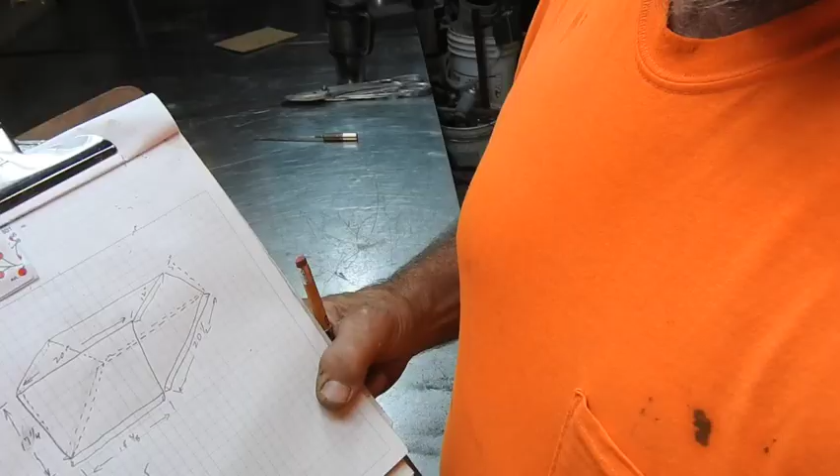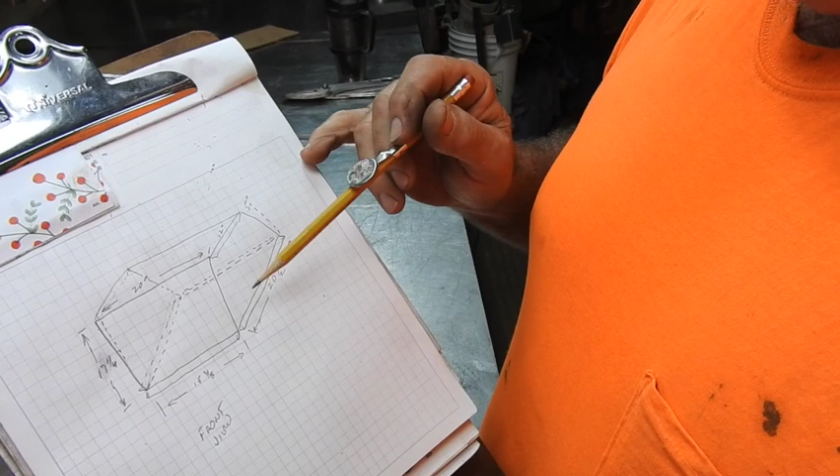The plenum for today is going to be a little bit strange insofar as I managed to get the furnace to where the front of it could go straight up and down, but the left side has to taper out 3/8 of an inch in a 17 1/4 inch true height, and the right side has to taper out 1 3/8 inches to the outside. At the same time, the rear has to funnel forward or tip forward 5 inches in order to meet the opening we have. So it's going to be kind of strange. One side, just the front, is going to be straight. Everything else has to be an angle.

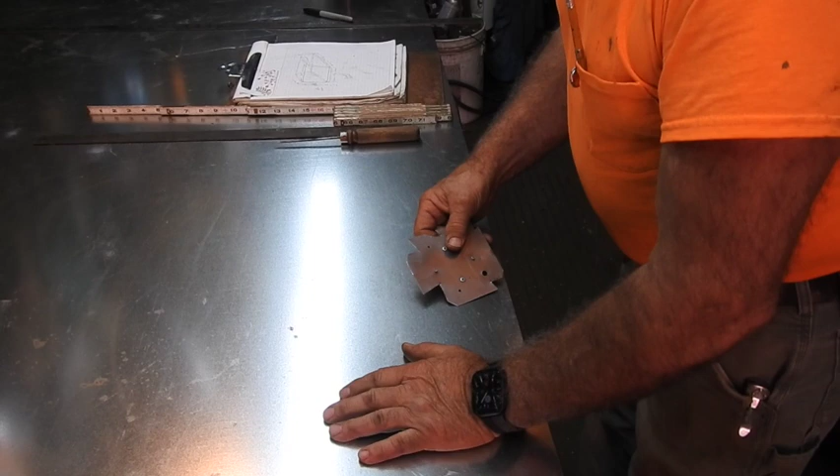When you start laying something like this out, you want to start by laying out something you know to be true. We know we're going to have 1 inch at the bottom for a double hem flange. We know it's going to have a 3/8 of an inch offset to the outside. So until we decide if we're going to put a 1/4 inch bend on it, a Pittsburgh, or a lock former bend on it, go ahead and give yourself plenty of room.

So make yourself a false edge, roughly 2 inches in from the outside. Another known is the 17 1/4 inch height, so you can put a height on it of 18 1/4 to compensate for the 1 inch double hem. We'll go ahead and mark that as 18 1/4 height in two places. Then we can turn right around and drop 1 inch off of that, because we have to have 1 inch for either the drive or the S at the top.

Now we have defined both the top and the bottom of the fitting, or the true length of the fitting.

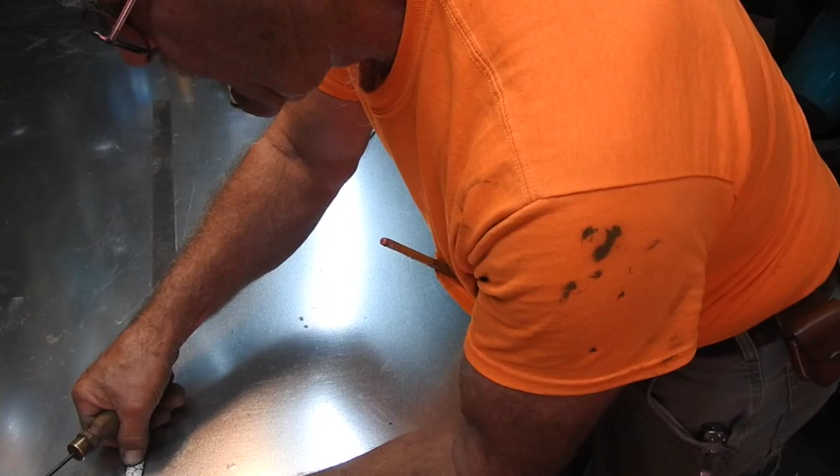Now, because we marked a false start line of 2 inches in, we'll go ahead and mark one up here, 2 inches in on the 1 inch line down from the top. Then from there we'll add 3/8 of an inch back to the outside edge, and that'll give us our 3/8 of an inch offset to the outside edge. Once you get that 3/8 marked, you can connect those dots. That angle right there will be the 3/8 of an inch to the left.

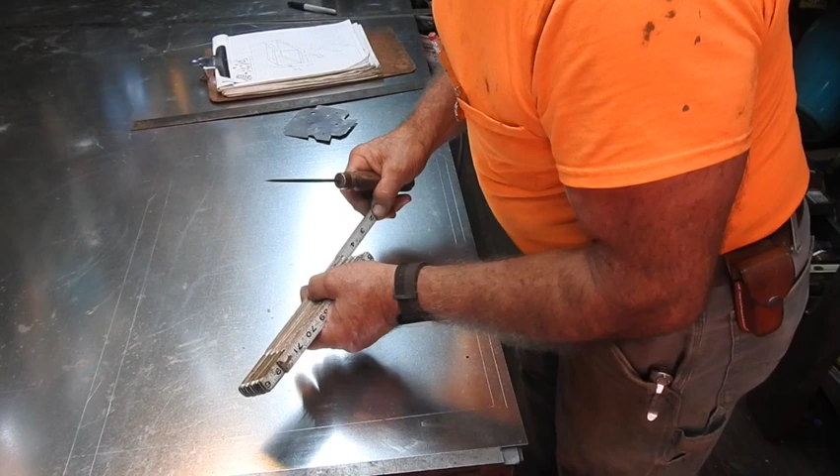We'll either have to add 1 inch for a lock former, or add a 1/4 inch for it to go into the lock former. That remains to be seen. We know the top width is going to be 20 inches, so we can come off of that line and mark a width of 20 inches on the 1 inch line.

And we know the layout calls for 18 3/8 at the plenum bottom, so we can go right here at 18 3/8 along the 1 inch line. Now we can connect those two dots. That's the angle for the 1 1/4 inch that it has to go out to the other side.

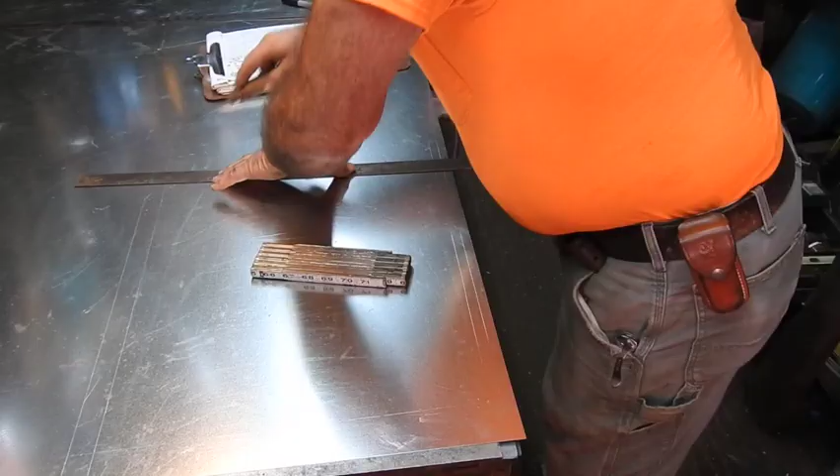I'm not going to put a lock former on this fitting on the front of it, because I don't have access to lock the lock former over on site. So this is going to have the 1/4 inch bend. We'll mark a quarter, and then we'll connect those. That's the basic layout for the front of the plenum.

Trim out the corners.

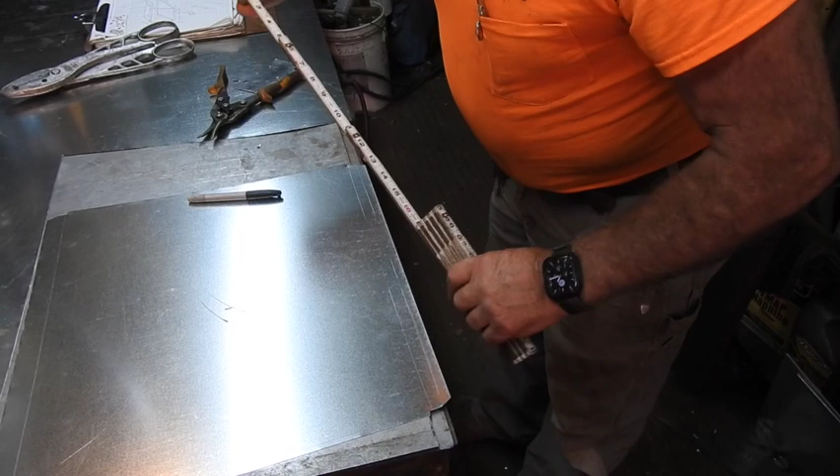We know the true length of this is going to be 18 1/4. Now to get the length of the next piece of metal, measure from your 1 inch mark right here to your 1 inch mark right here. That's roughly 17 1/4 inches, plus 1 is 18 1/4 inches. With only a 3/8 inch offset, we only gained about 1/16 of an inch in that offset. So 18 1/4 is going to work fine on both of these layouts.

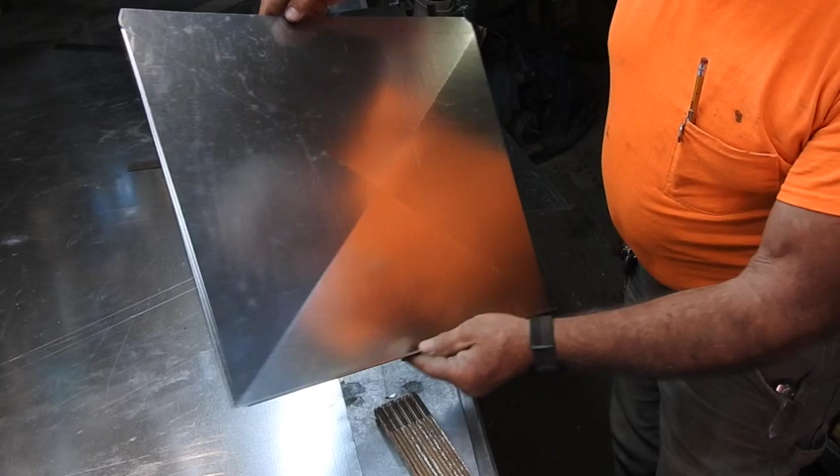Here it is folded up right here. Now we can actually measure and get the lengths of the material we need in order to lay out the sides. This side is going to get really strange because it has to start out at 20 and a half inches at the bottom, it's got to go up 17 1/4 inches, and it's got to drop down to a 12 inch dimension. So I'm going to go ahead and cut that out.

There's the layout of the right side, cut and ready to fold. Again, we have to lay it out opposite because I'm looking at the outside of it, and we need to fold it to the inside. I like to cross break this before I run it through the lock former.

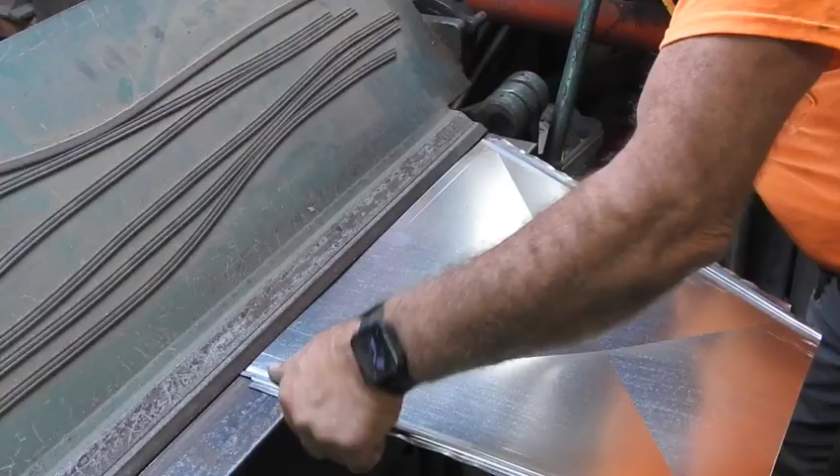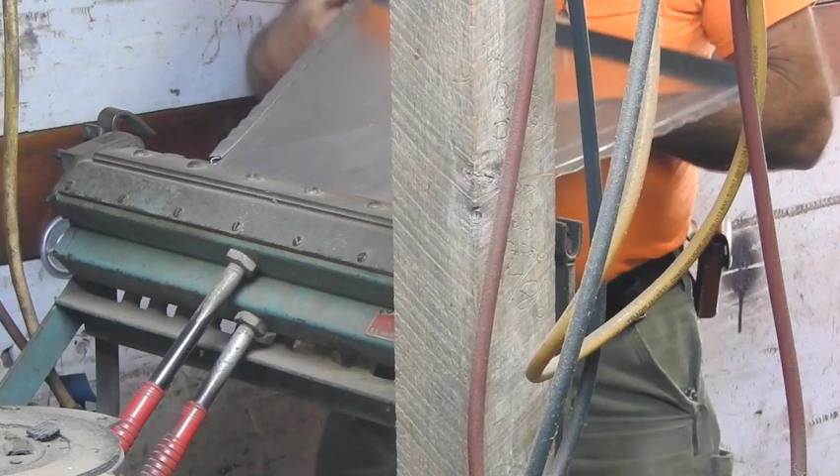Now we go to the cleat bender and form the drive cleat on the back side of this. Again, start off with what you know: the 1/2 inch double hem down at the bottom, our actual raw length, which is going to be 18 1/4 for a finish of 17 1/4 when it's all said and done. So we'll mark the top first, 17 1/4 plus the 1 is 18 1/4. Now we can mark those.

We know the bottom is going to have 20 1/2 inches. This is going to be the front, so this is going to be straight up and down. We know this is going to have a lock former, so we can mark the lock former 1 inch on this. On the 1 inch line, come in 20 1/2. And we know the top is going to be 12, so come in 12 off of the 1 inch line. Connect those dots, that should be the angle of the transition.

Add 1 inch to it for the lock former at that angle, and that should be the layout. So now we'll cut.

Now we can trim. We'll cross break and lock on.

Now this guy here gets a little tricky because we're not really using math to figure the angle. We're using actual measurements off of the piece of metal. But again, go with what you know. Double hem, we know we're going to have a 1/4 inch on each side of this.

Cross break, fold the 90s on it, put the hem on it, and we'll come back. This one doesn't get quite a 90 because it has to go up at an angle. It's all field adjustable.

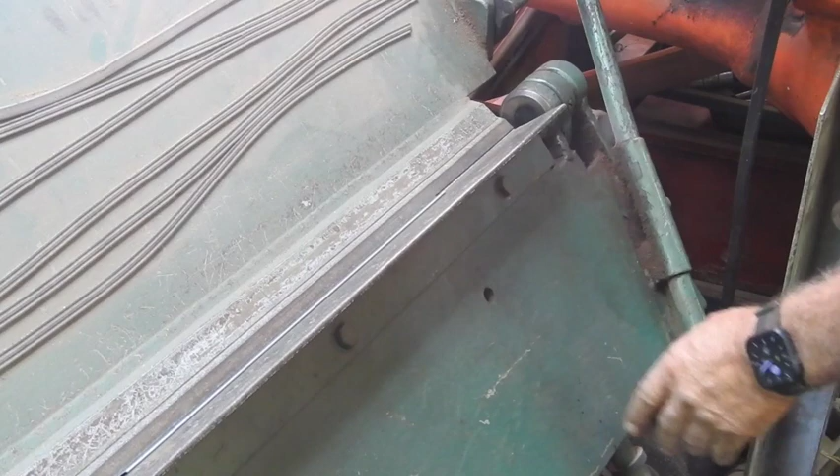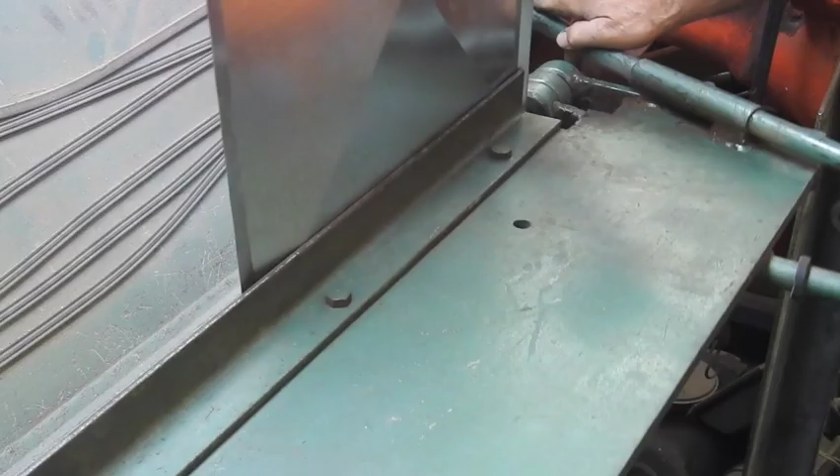Okay, so here we have it. Now bear in mind, this is not assembled, it's just stuck together in the Pittsburghs. It's not squared, not plumb, like it will be on a job site. But remember, I always say don't assemble all your fittings, especially on furnace changeouts, inside the shop, because you need to field install those depending on how the access is around the furnace.

This particular one here, I believe, is going to be able to be installed with the two sides and the back in one piece, with the front piece, which is right now in the back, being the last and final piece to be installed. But I think I'll be able to do it that way.

But here you have, it's 18 3/8 at the bottom, flaring out to 20 inches with 1 1/4 going that way, 3/8 of an inch going that way. At the same time, it's drawing inward to reach the 12-inch dimension of the existing duct we have to tie into.

And this will actually be the front view of the furnace. So what you'll see is you look at the very front of the furnace right here. You can see the slight flare to the left side. That's a 3/8 inch flare out with the 1 1/4 flare this way as it changes dimension from 18 3/8 to 20 inches.

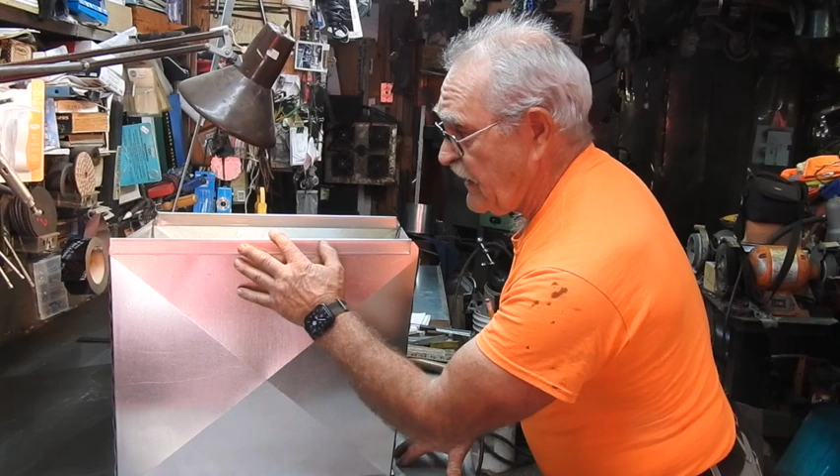This particular job is a prime example of why you don't want to assemble in the shop plenum. Leave it in 4 pieces so you get to the job site to decide how it needs to go in. This particular one here, you can see I've got the 2 sides and the back knocked together so it can go together in 1 piece. Then we'll add the 4th piece on the front.

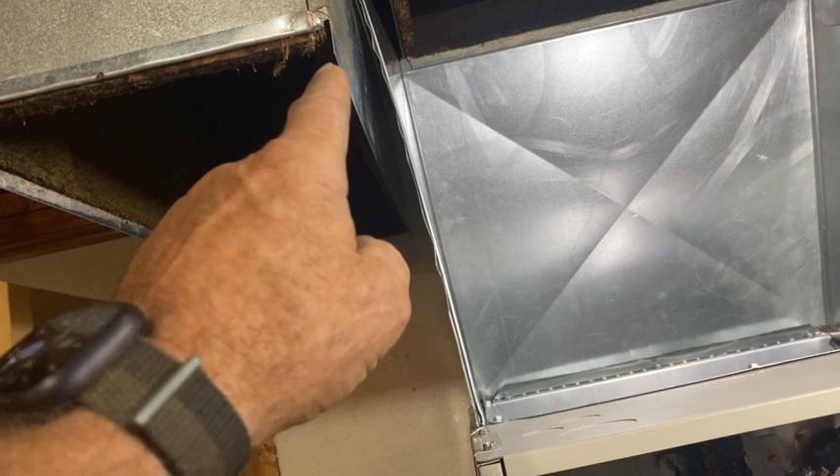There I just raised the 3-piece assembled part up, set it into the S in the back, and got it ready to line up with the drives here on the side. I'll be able to drive those right into the side, then put the front on, and then latch the Pittsburghs over. But you see how come I said that we couldn't put the Pittsburghs on the front piece and the back piece, because we didn't have access to hammer from the side, but we do from the front.

Now we got to attach the drives up at the top, bend them over, and this part's done. Well, there's the strange offset plenum back in place, and you can see I've got the return air completely tied back in the way it was originally, and we're ready to slip the filters in, and my buddy's about ready to go ahead and start wiring and doing everything else.